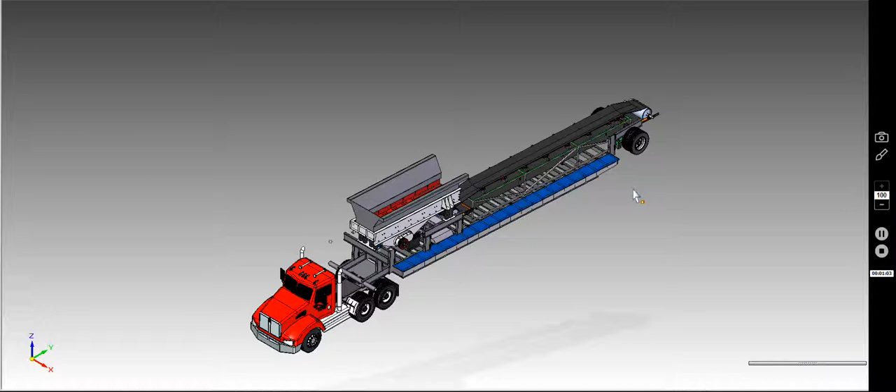The axle assembly of the rear is equipped with air brakes. Trailer will have lighting, meet all Department of Transport specifications. One of the nice things about this design, the side view here you'll see, is we can keep everything under the legal limit, under the legal width. No special permits required to tow this vehicle.

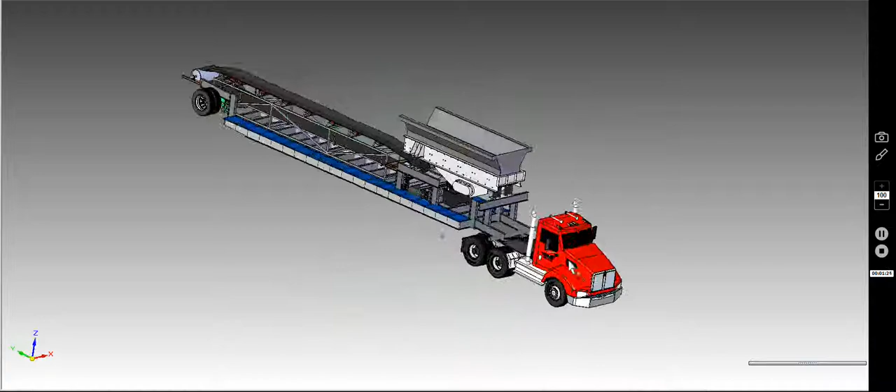Loading and unloading the unit itself is quite simple. We have a drawbar up here at the front. You can hook an excavator to it. We can add a wheel loader to it, just pick up, take the weight. The tractor can then drive away, and the unit can be set down onto the ground.

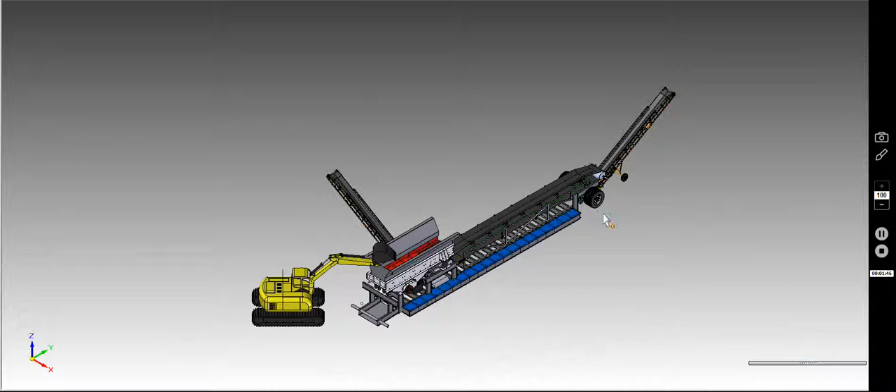If we zoom over here to an assembly view of what it might look like in operation, as you can see, we have the entire frame of this system on the ground. This makes it incredibly stable. No need for stabilizing jacks. No need to have elevated work platforms or anything like that.

One of the nice things or features about this is we have an 18-inch maximum working height, so we don't have to worry about any guardrails or fall restraints or any of that sort of stuff. The other thing is the hoppers, sorting bins, are right at the same working height as the guys. They're not, no need to rack them up higher or elevate the containers or throw stone over the side into the containers and risk damaging anything.

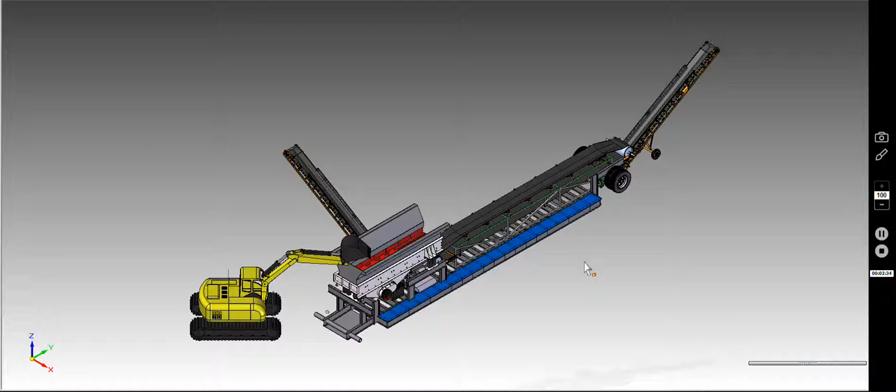Let's talk a little bit about the equipment that's on here. Start off electric 25 horsepower vibrating grizzly deck. This one is a 40-inch by 16-foot, sort of speccing a Trio to start here.

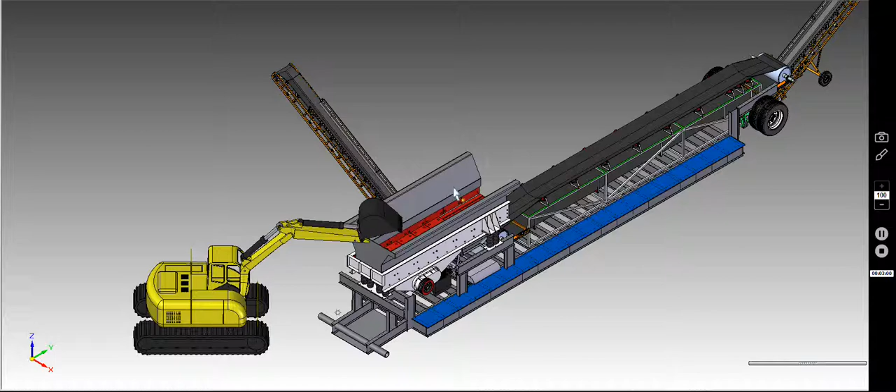The hopper on the top, because of the low height of this, is quite large. Gives you a lot of feeding room. Once the material starts to vibrate down the grizzly, all the fines are going to fall through the bottom of the grizzly, 4-foot grizzly bars. They're going to go down through a hopper underneath to a side conveyor.

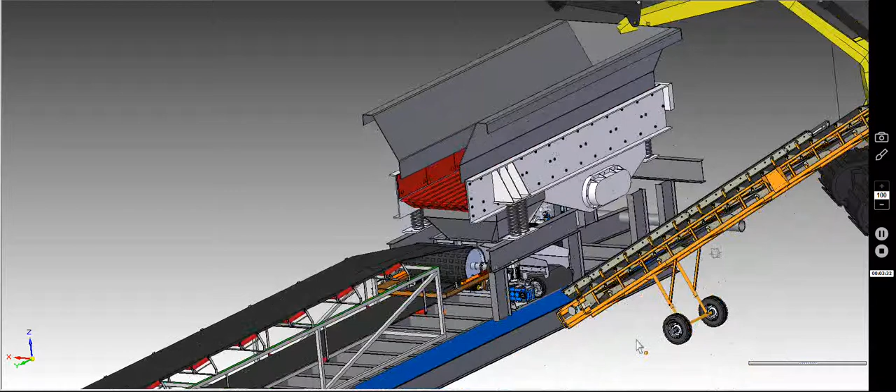The side conveyor is going to discharge onto an existing stacking conveyor. The side conveyor is an electric driven conveyor as well, with variable frequency drives. One thing that is going to be here that we have not shown is the conveyor itself on the side will have a fold-up section that will allow you to either elevate or extend out to your stacking conveyor.

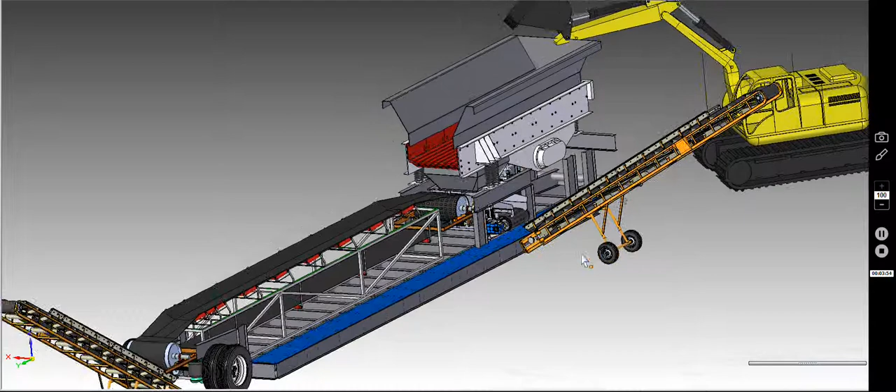We realize that the deck is quite low to the ground. It might be hard to get into the hopper of the stacking conveyor. The other material, as it flows down onto the main conveyor, is going to come down a ramp here. More than likely we'll have to have a load plate underneath to take the impact of any of the rock. It's then going to travel down the conveyor.

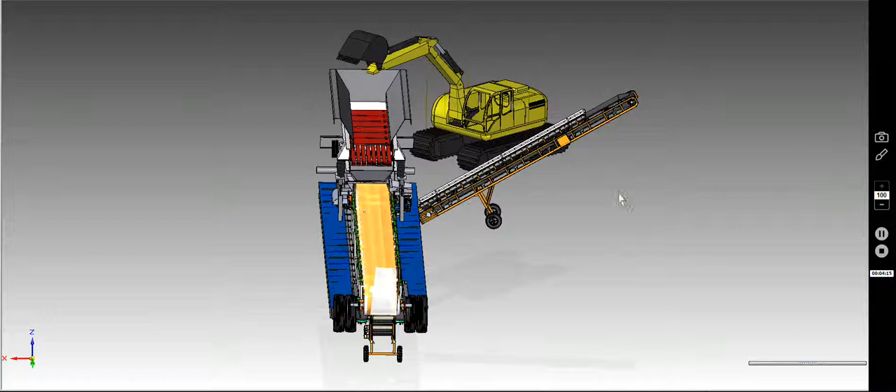As it travels down the conveyor, the crews can work on either side and pull stone off into the hoppers. The working deck is approximately 30 inches wide. The conveyor, we're trying to fit a 20-foot conveyor section with 24 to 30 inches in width. Conveyor height 36 to 40. Again, those things can all be specified or modified down the road.

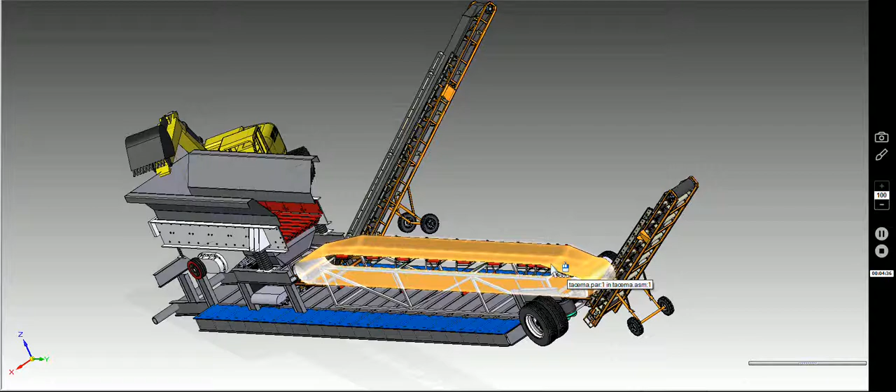Again, as the remaining waste stone comes off the end of the conveyor, there'll be another flip-up section. We're talking 8 feet, possibly even as low as 6 feet off the end. That would go into, again, an existing stacking conveyor.

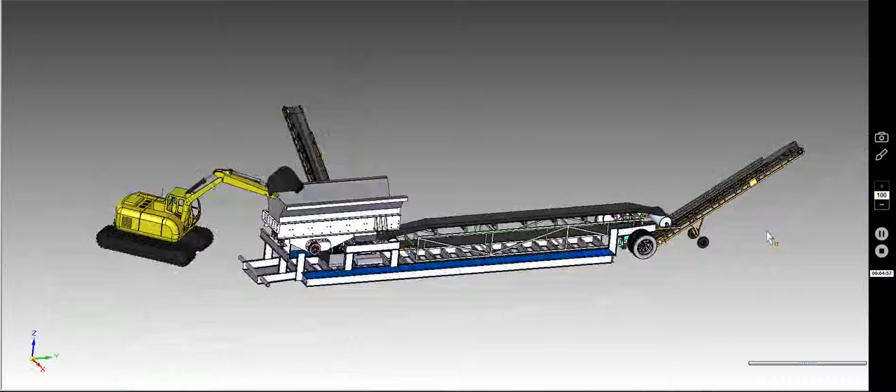So that's kind of our concept right now. Again, keep in mind the entire thing needs to be engineered. We're going to have to do some pricing takeoffs if you guys are in agreement with this concept. Anyway, I hope you guys like it. I'll just do a little zoom around here so you can kind of see all views of the container before we sign off. Thanks.